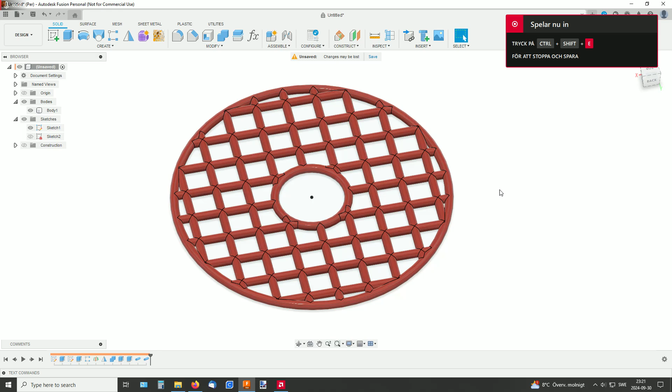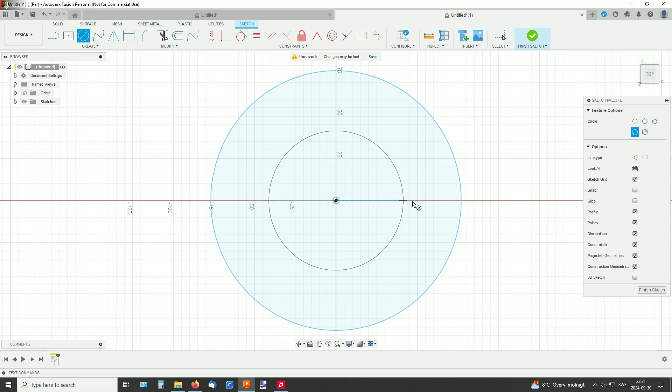So there was a question about how to create this kind of shape, and I made it like this, and I'll also show some problems I ran into along the way. So new sketch. Let's draw some circles like so, and also something in the middle. Finish sketch.

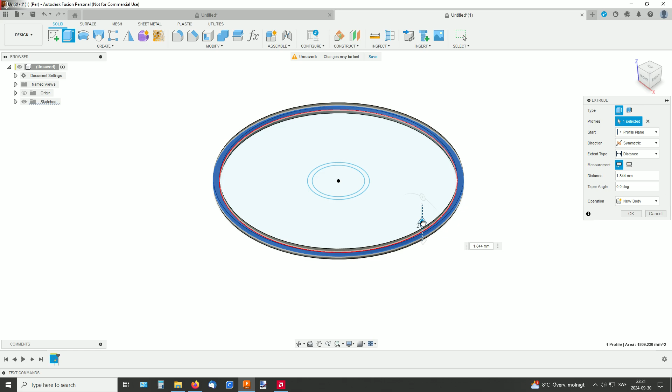First I will create this outer part, and this will serve mainly as a boundary for our wires in the next step. I do this symmetrically, so it goes both up and down. Okay. And now for one of the wires. Small circle here, that will be the diameter of our wire. Finish sketch.

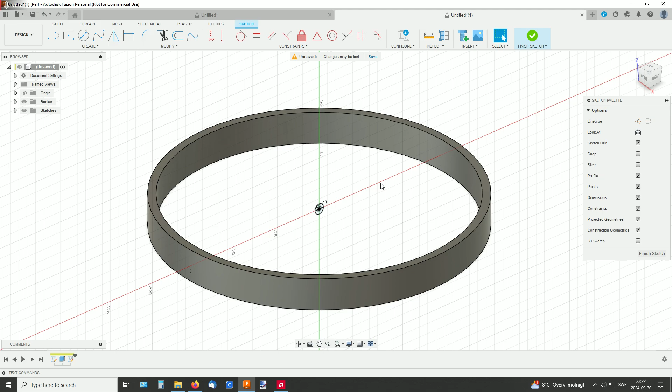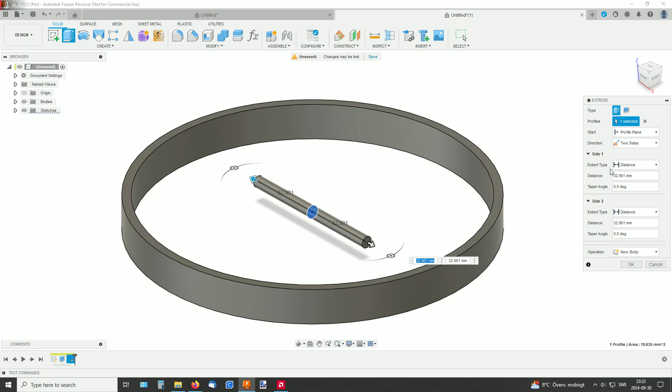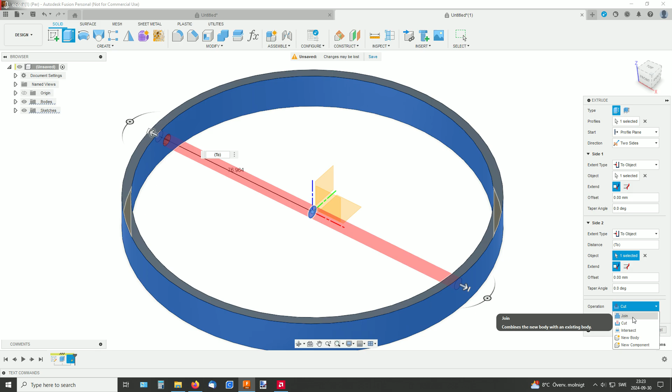And extrude it. And my first thought was to make this extrude symmetric, so it goes both ways like this. But in the extent type, there is no option for to object. So instead of symmetric, select two sides, and for this distance, instead of distance here, select to object, and it will be up to there. And same over here, to object, and click away over here. I don't want it to be operation cut, but I want it to be a new body. Okay.

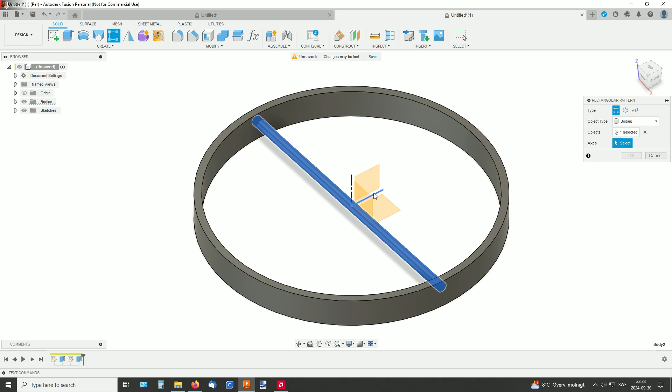So next step is to pattern this. I have a rectangular pattern here, but you also find it down here. Rectangular pattern. And I select this body, and for the axis I select this. And I want it to be symmetric and an odd number. That is enough to cover this. And the problem here, as you will see, they are poking out of our shape.

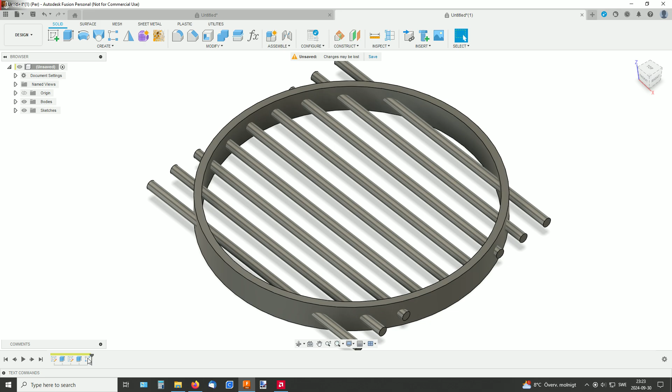So to get this to body setting in the extrude feature to also work on these, I have to select, instead of bodies up here, features and select the extrude feature. And for this to work, I have to change the compute type to adjust. That way every one of the instances will notice that there is the body. I have to stop there.

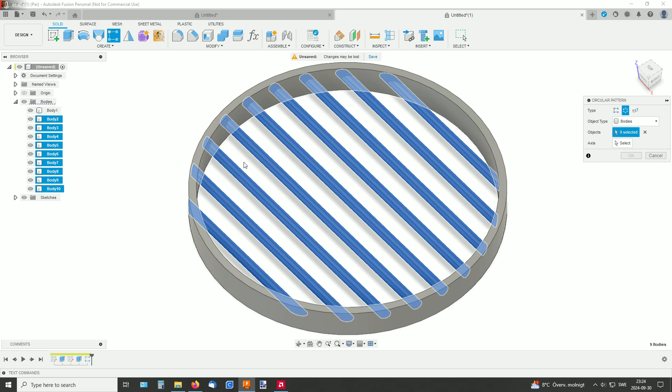So now for making them go the other way as well. And my first thought was to create a circular pattern of all of them. So select all of the wires, and the axis will be either this one or something that goes around here. And if I just go down to 2, they will flip 180 degrees and create copies, but they are in the same orientation. And that's not what I want.

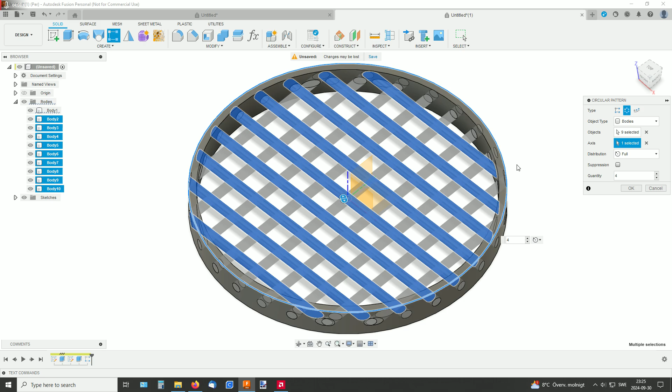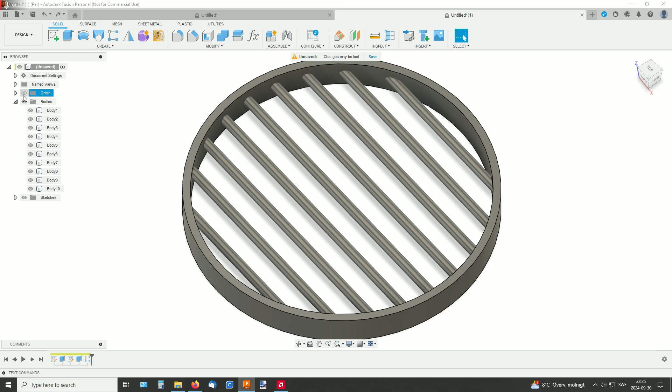And if I up this to 4, it looks good, but it created lots and lots of bodies, as you see here. So each one of them, those are in fact two bodies. Not very elegant. So let's undo that. I figured out I could instead mirror them around a construction plane. So the construction plane has to be 45 degrees between these two. And one way to do that would be to create a plane at angle from this axis.

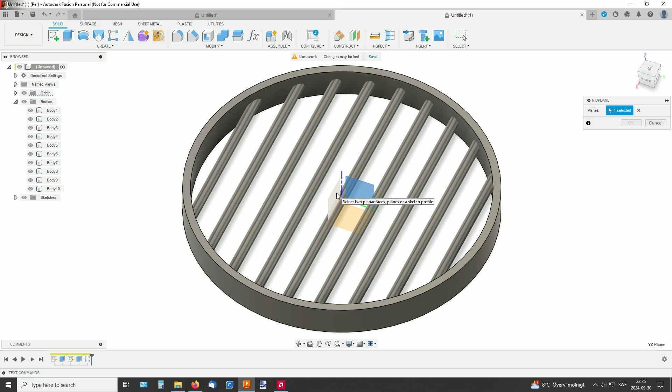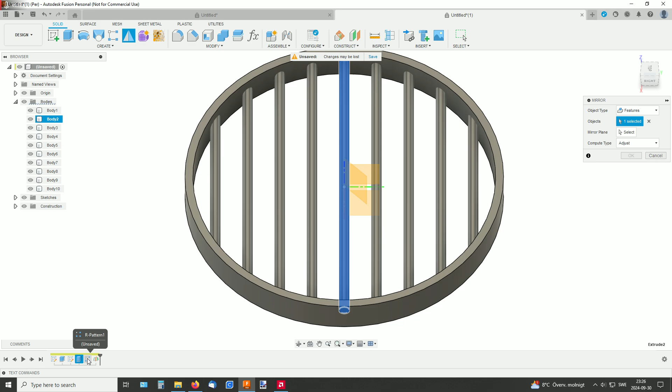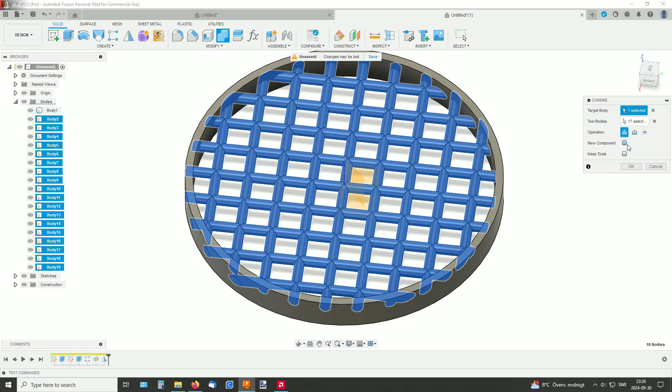But I recently learned another way to make a midplane between two angled faces, and the resulting plane will be right in between them. So let's mirror this, and I will change this from bodies to features and select the extrude and the pattern. And our mirror plane will be this one. Okay. And then we can just combine them all. So select every one of them and combine. Join. Okay. So now you only have two bodies.

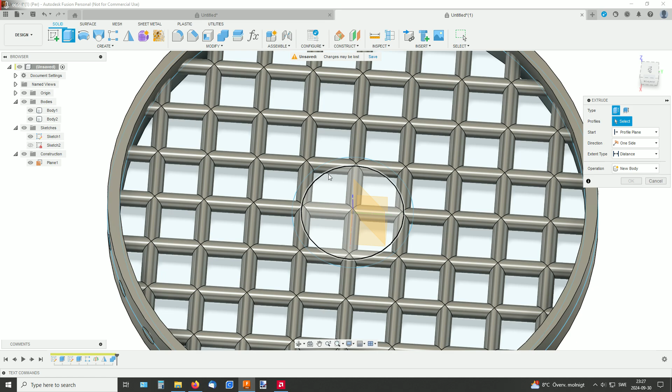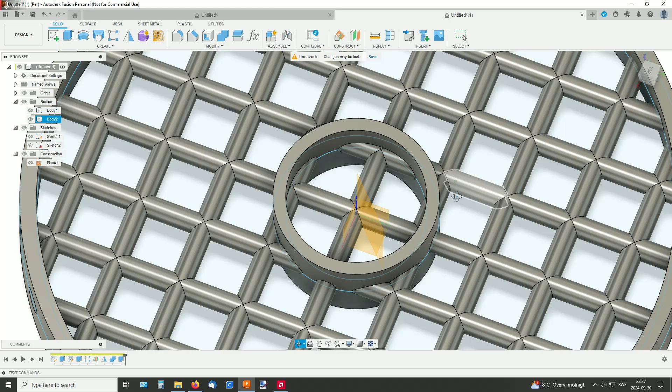And first I created a shape in the middle that looked about the same as this one by extruding from our first sketch this profile, make it symmetric, and about the same height as the outer one. And instead of cut, join. Okay. And to get rid of this mess inside there, I made a new extrude from the center profile of the same sketch. Symmetric again, and just cut away.

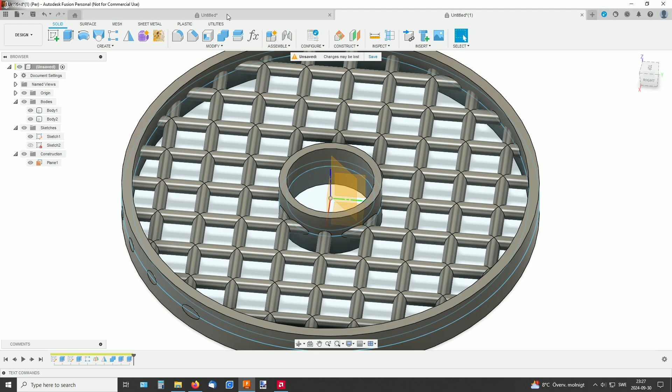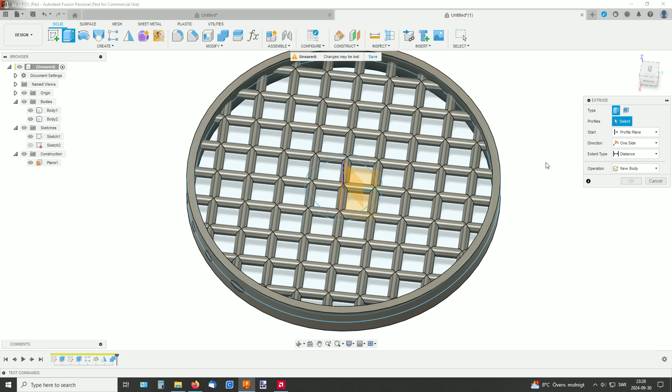So maybe this is okay, but if you instead need the outer and inner shapes to be more like wires, we will undo those two and instead just get rid of what we don't need here with an extrude. And for profiles, I select both this and this one, and also the outermost one. Symmetric, and cut away.

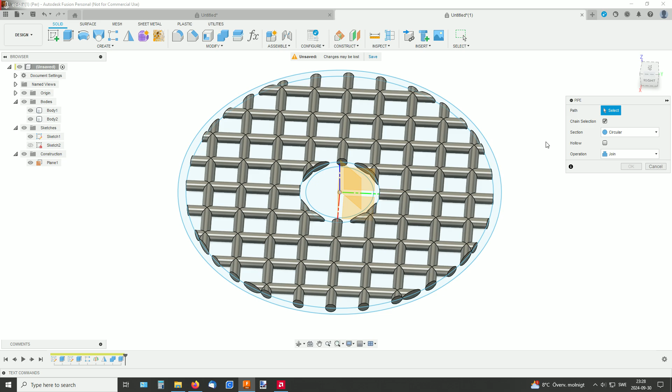And now we can just create pipes along those two. So pipe. This is the path, and this is already set to 5 millimeters, which was the same as the diameter of those. And join, and OK. Repeat pipe, and this will be our path, and OK. So there you have it.